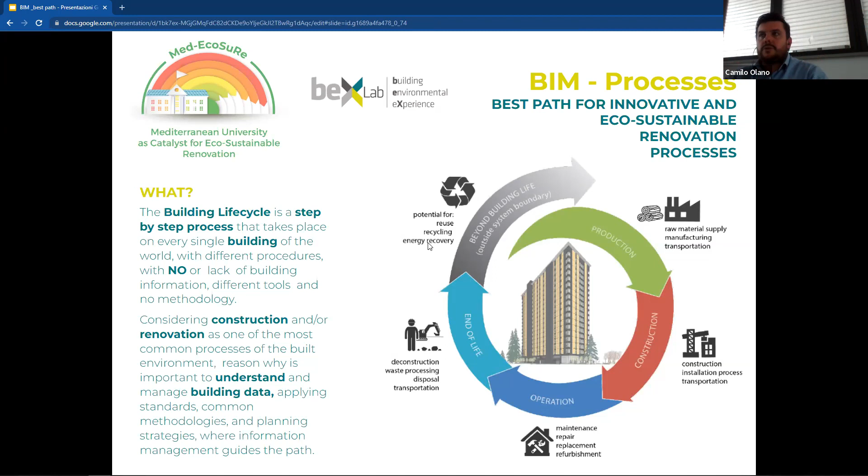So who is intended to live in this? The building life cycle process is dedicated to the building managers. Building managers means in terms of teams of people working together, reading, understanding, managing information that may come

through the life of the building and that comes from the construction process, from the planning process. So they have to mix up both informations. They've got to understand where we have the problems, where we can act in a different, specific way, or here or there, where we can just get more profit in terms of energy efficiency, or in terms of the best solution for the goods of the students or the teachers, or the specific use that we require in terms of operational matters regarding the university campus.

I'm going to be talking most of the time referring to the example of a campus, because it's what we're intended to work on through the MedGreen Forum, the Med-EcoSuRe project. Sorry, cables are crossing down.

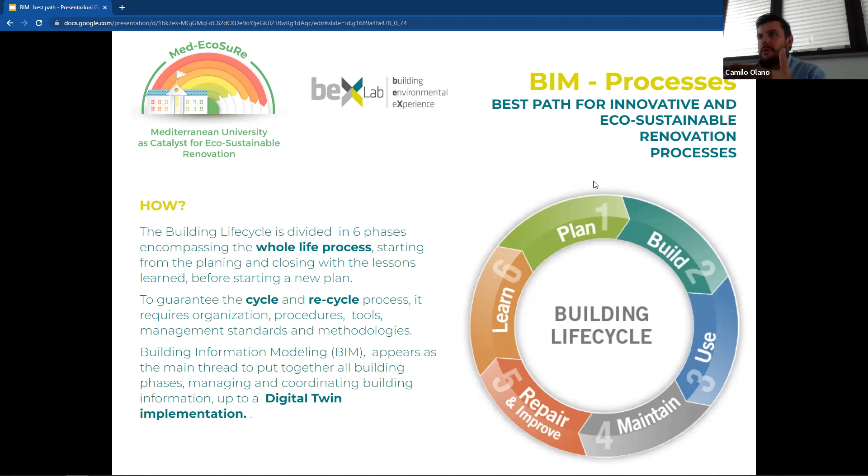We can have all this information together. We can collect information from many different parts, also during the life of the building. We collect them through the planning and construction process, but the building doesn't stop there. It's live. We can have another type of data, another type of information connected to this information that we already got, to enlarge this knowledge of our buildings. We can use it also through a digital twin implementation.

So why are we thinking of something that is, we are talking about managing information. We are talking about poor knowledge of building consumptions. We are talking about a knowledge of building components and materials, difficulties or inefficient maintenance and operations of buildings, and all the planning and renovation processes that are not cost effective.

Because if we don't have the information of all these things together, how could we plan something? How could we really target to get something and really understand what we plan is intended to do something and achieve it? And this is how the big problems we are having now, also here in the university.

We've done a survey. We tried to understand how they manage all the building assets in the university. And believe me, these four elements, these four matters that I'm showing here are the most representative of the big problems that we found here in the university through our research and trying to understand how things are.

In this survey, we enlarged it also to other entities, other universities who are managing assets, and the problems were nearly the same. So the lack of knowledge of the information, the lack of uniformity, consistency of this information is one of the most problematic matters we've got.

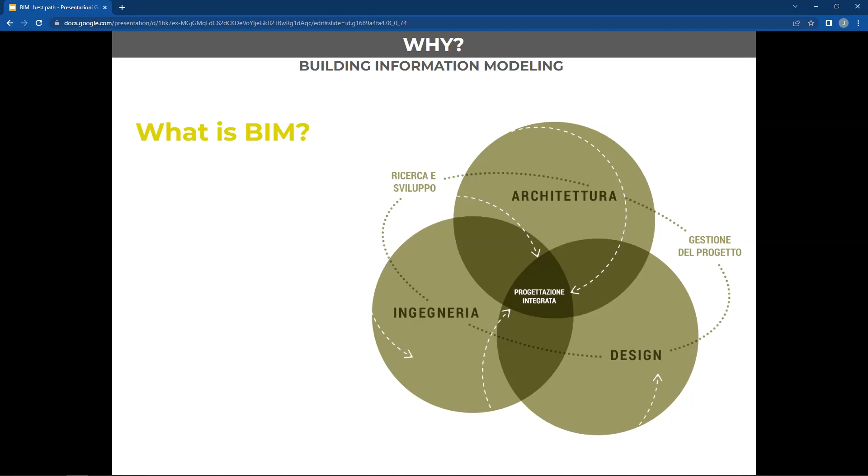I can answer that if you don't mind. Yes, please. BIM, as you said, is building information modeling, and is considered a process to create and manage information on a construction project. We can also view the project life cycle as well, and use a model to make a digital description of every aspect of a building. Is that a good answer? Yes, it is the right answer.

Because there is no right answer, there is no wrong answer. If we answer in the way you did it, because we talk about information, you talk about process, because it is what it is - it's just a process. It's not a software, it's not just a model - they are containers of information that are part of a process that goes through the planning, construction, and life of an asset. That's how it is. So the important thing is that it's an integrated project that has information from many different roles, from many different inputs that are not only the ones who are planning, but also coming from the ones who are going to operate it, coming from the ones who own the asset.

So we've got plenty of different directions from where the information comes and how we can process this information and use it through all the different phases of the building life cycle. The term BIM continues to evolve because over the years, from different points of view, according to the phase and the use of different kinds of information, the meaning of BIM has been evolving.

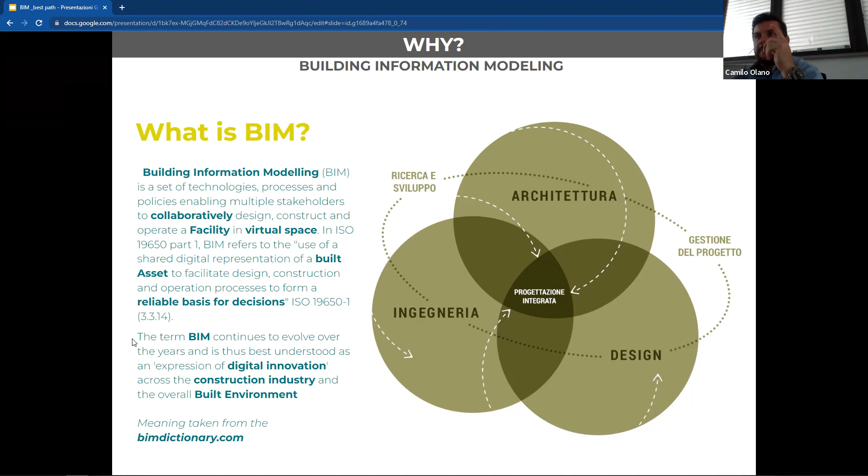But it's interesting to see that something common is coming, and to understand that it's a process. It's very nice because it's the first time that someone has answered right. So thank you.

So when we talk about building information modeling, we talk about something related only to the architecture, engineering and construction industry, as if it's a process that could only be applied to our world, not something we can apply to any other industries. They've got their own management, their own ways of managing information. We've got the BIM only for our industry, which is construction, building assets, and our built environment.

Information, as it says, is the soul of BIM. It's in the middle, it's the soul, and it's everything about the processes and the use of that information during all the different phases and the management of it.

And then the modeling - now we talk about models, we don't talk anymore about designs. But we're not talking about models or geometric models, we're talking about information models. That's something different, completely different than what we've got in mind, because a model many times is used as a 3D model, and that's just one part of the information we've got - the three-dimensional information of geometry. But we've got plenty of other matters of information that are part of our models.

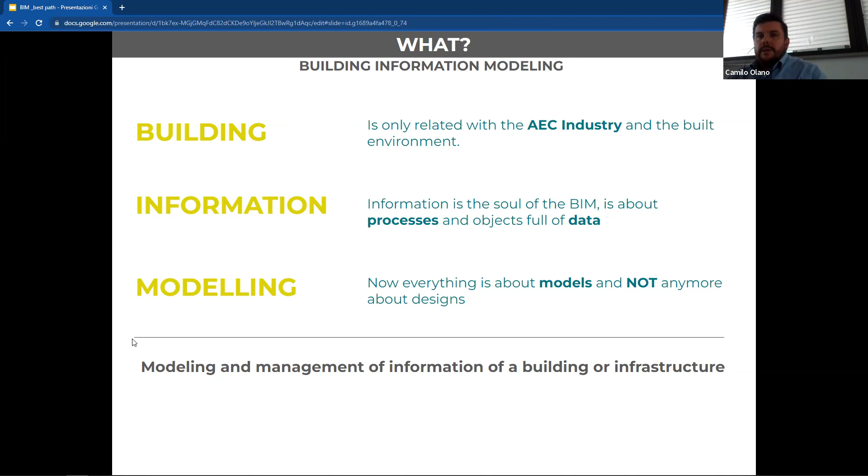The other very important thing that we've got is the collaborative process. Why? Because up to now, we have been exchanging information in a traditional way.

I need a drawing, I send a DWG. I need something else, I send you a PDF, a Word file, through emails, and now we also use Drive and folder structures that sometimes aren't even well known to everybody. We don't have control of what we share, how we name it, who I've sent the information to, or whether that's the one who was intended to receive it. There's thousands and thousands of emails and messages. Now we've also got WhatsApp messages, voice notes, photos, to exchange information.

But how can these exchanges of information be registered? How can we keep track of what really improves the process of a project?

It's difficult to see and understand. Yes, sometimes it's easiest to take a picture and send it to the builder saying, please, this has to be changed, on WhatsApp. But if he had his cell phone off, then another person arrives who never received the information - they've done things differently, and we can't say whether the information was sent by a WhatsApp message or got lost in an email that wasn't properly written. And that's how things have been done up to now, with different communications, sometimes not including the other people who were maybe interested in something we weren't thinking of.

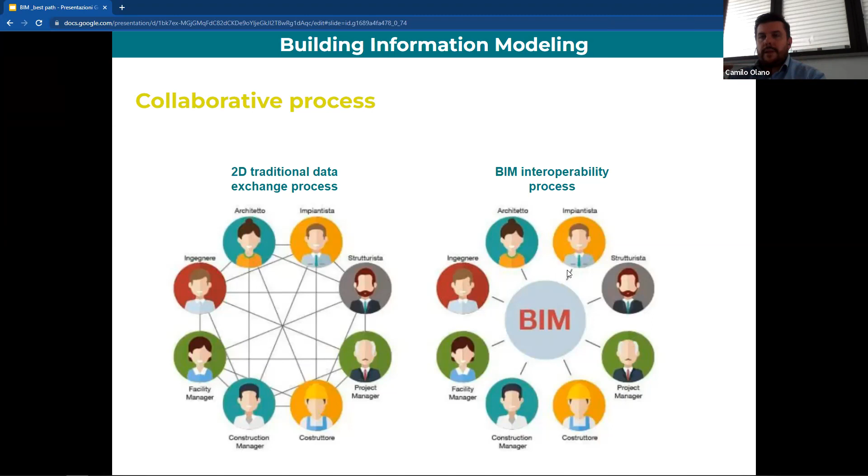That's just an example of how things should work. Of course, we don't have to wait a week to make a new issue — if something has to be changed, we can change it and communicate. Emails do still exist, and a phone call is always welcome to share, combine, or project ideas. But if we've organized everything else properly, all the other ways of communication are just intended to improve the speed of the process, so we get better results in the planning, construction, and management phases.

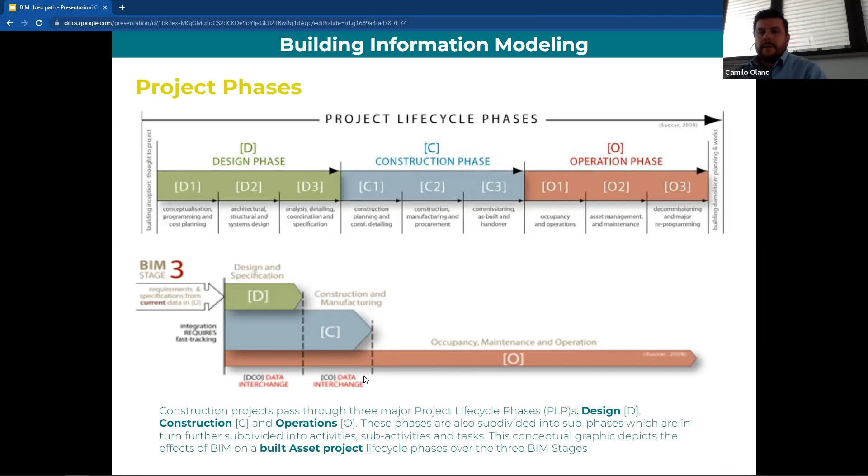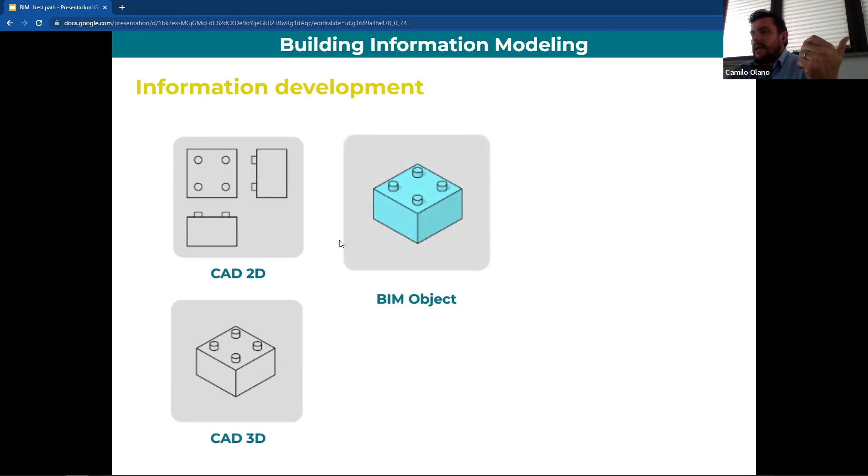But the real difference is that we've got plenty of information connected to that specific visualization — geographical and geometrical information that allows us to represent it in three dimensions. But the real value of all this is what is there that we can't see.

We've got up to 12,000 cells of information to fill per single element in a project. That's too much from my point of view, because managing 12,000 cells of information per element on a huge building carries so much information that I'm not really sure we can manage all of it.

So it's important to understand which information is really required, which information do we really need, which will be useful for the operation, for the construction, for the planning, for the future. That's the information we may require to place on a model. And according to the phase we're in, this information may get richer, may get used, and at some point it may not be useful anymore, so it can be reduced.

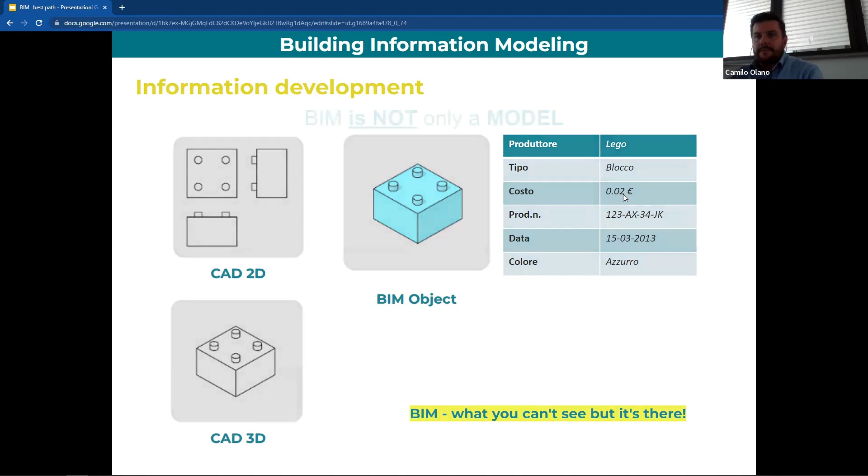What I mean is BIM is not only a model. It brought a lot of new different terms, different documentation, different specifications. And now we talk about all of this.

For example, the CDE is a common data environment. We talk about the IFC, that is the exchange file for the open BIM. We talk about LOD, that is the level of detail. We've got clash detection, the COBie. COBie is the way of exchanging information between the project model and the asset model, in terms of exchanging information from the project to the operational phases.

But that's only in the UK, which means we've got all these new terms, and all these terms have to be adopted, have to be assimilated into our life as project directors, as project planners.

And we have also the new BIM dictionary, because it brought so much, but then everything is written, and that's helpful, because we can just go there, look at it, learn from it. The first time we learn something, the second time we go there and look at it again, the third time we already know it. We already can repeat it, and then it will become part of our process.

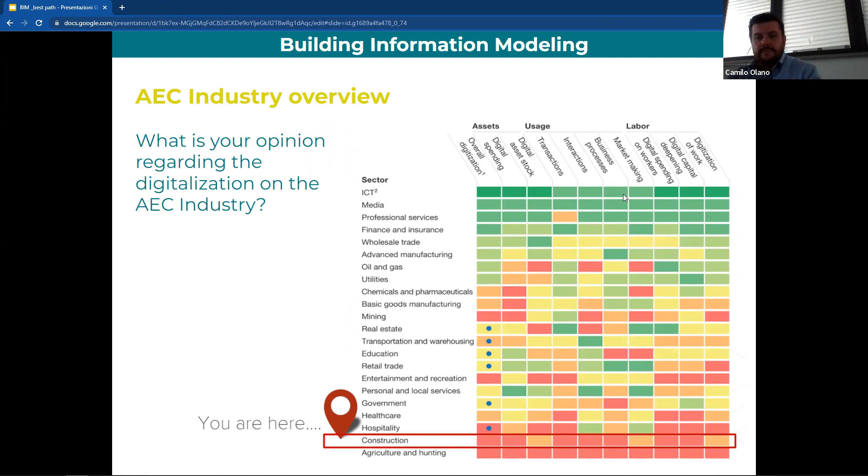So this is always something that is very nice. Who wants change? That's a real question. Who wants change? Everyone wants change. Do you want change? We all do. We all do. For my part, myself, yes, sure.

Of course we want change, but the thing is how we have to change. Yes, maybe, but then everyone wants to change—who wants to change? And then it's when everyone... no one, no one changes. Yeah, because it's easy to say we want change, we want change, but everyone else, someone else does it for us. But if we have to do something for that to come through, that's where we find ourselves in trouble.

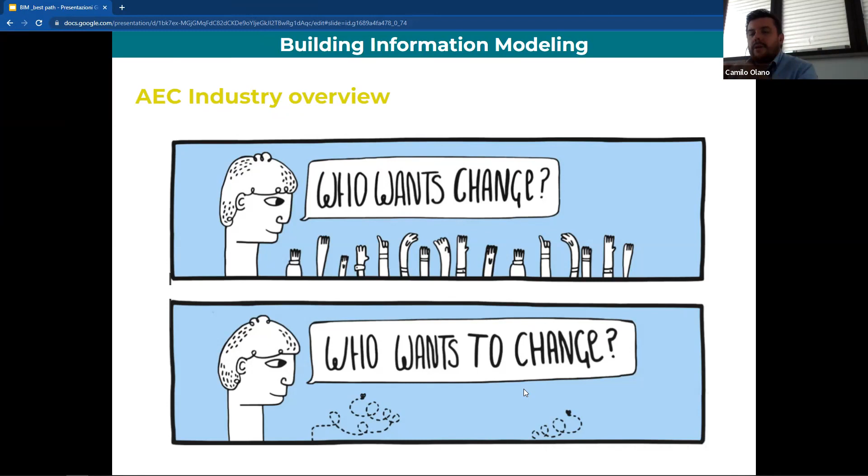How we can change this point of view from the people, how we can just get the commitment of others to make their own effort for the change to come. I think that's the most important thing we should build up, try to bring the others to our side, because I know you are keen to do it, you are trying to do the change, but we need to bring all the others together with us to make that happen.

And why the BIM? Because there are directives already done, and it's very helpful that the European community established that public bids and projects have to be developed using specific electronic tools, such as building information electronic modeling. This is absolutely good, because at least in terms of normative, in terms of regulation, someone started to think about it. The change is not determined by the goodwill of people, but by the obligation or restriction that the law has to be applied.

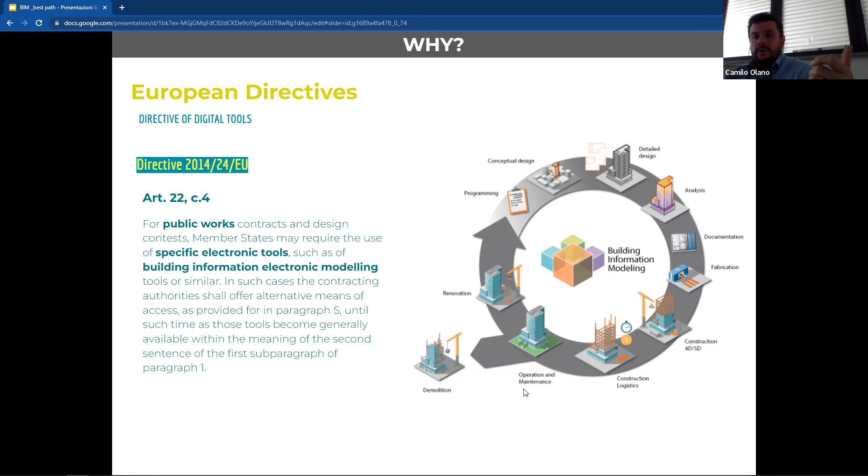It's not the way I like to do things, but somehow in some cases it helps. It helps because now these things are starting to change. A lot of work is starting to come through the people and at least starting to think about how things may change. It's scaring for many, I know, but there's something there.

There's also another important thing: there are now international standards, and national standards, that may guide us how to do it. So if we don't know how to do it, or why we are doing it, there's normative, there are guidelines, there are standards that help us go step by step, following this, following that, to explain every single step we should take to get somewhere.

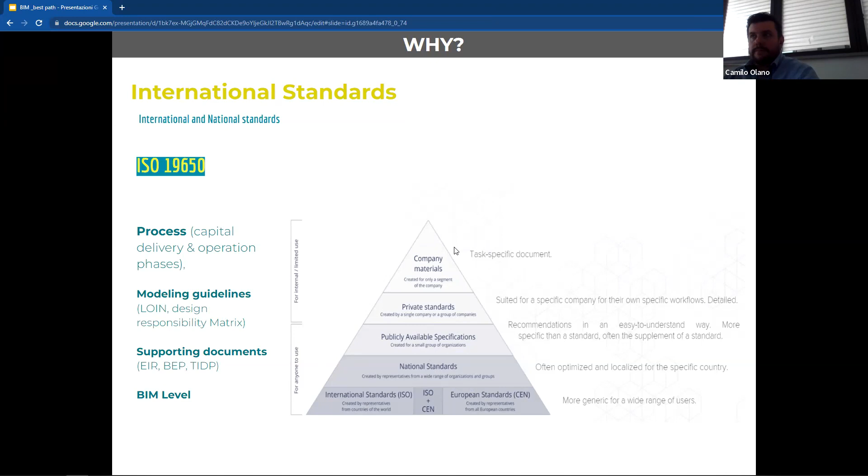There is the Building Smart entity that has been working on standardization, on terminology, on process, just to bring these things together for everyone. So there are plenty of different standards that have created all the information exchange, and there's also one huge international organization working behind it. As you can see, they've got plenty of different documents that allow us to make the process more efficient, and they're still working on improving it day by day.

We've got also the new BIM dimensions, because up to now we've talked about 2D and 3D, which are the geometrical part of it. We've got the spatial data, the specifications, the aesthetical elements, all the components, the layers of the different compounds in the entire building. We can have all the information on performance in different terms for every single package or element inside the building.

But then we can have also the planning, the schedule for all the construction process, which is something new, because we've got all the information, and if we've got a real good planner inside, it will guide us to understand all the timing. And timing in construction means costs. Good planning will help us understand for how long we will need to work on a construction process, how many people. We can plan properly - that doesn't mean we won't have problems, but if we plan it, we will have little problems that we can solve day by day.

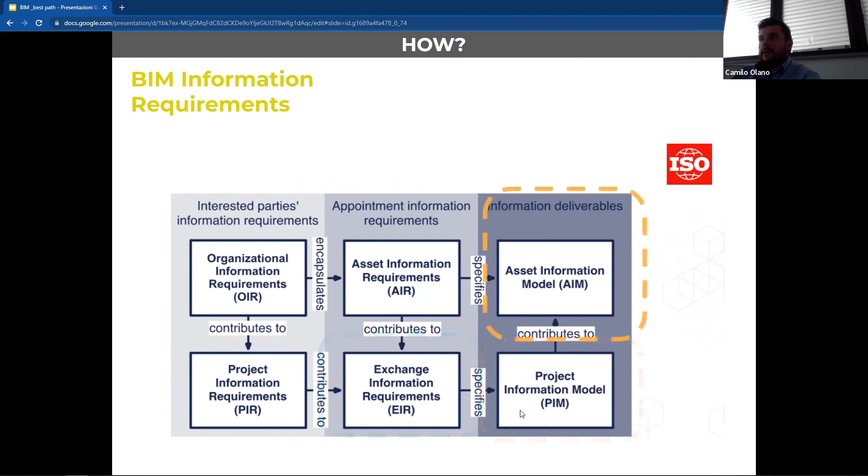Then we've got these two different levels that come from the organization: the asset requirements—how do I need the building, the project, to perform, what and how I am going to be operating, how much it costs to maintain it—and the project information requirements. This creates the exchange information requirement, which brings as a response the project information model, and then it becomes the asset information model.

What is important is to understand that we always talk about the project, but the project itself is only this little part, the delivery phase. I start here with my project, the starting point of a delivery project. We've got all the development, meaning planning and construction, and then we have the handover. Once we have the handover, we have the operational phase.

All of this is already standardized—there are books, manuals, and guidelines to follow. And you see here, the entire delivery phase is guided by the project information model, and the operational phase is guided by the asset information model.

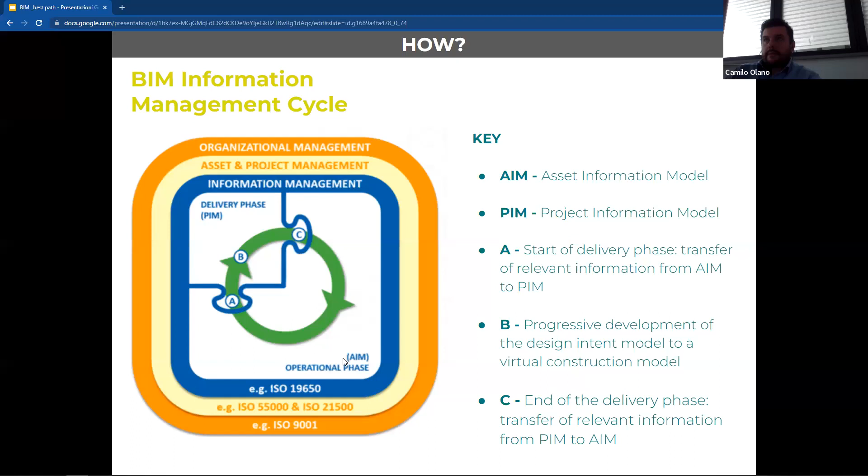Imagine all what I said up to now, which could be applied to one specific project—how complicated it will be to manage a building asset, as for example the one of the University of Florence, which is about over 300 buildings. And 20 to 25% of these buildings have cultural heritage constraints, with a lot of problems and difficulties in a UNESCO context that have to be managed.

We should somehow have its information, and we should know exactly how they are, what they are, how we can deal with it, how do they perform, if they are good or comfortable spaces for the use of a university, for a campus. Are they adequate or not? We don't know. We have plenty of it, but no information regarding it do we have.

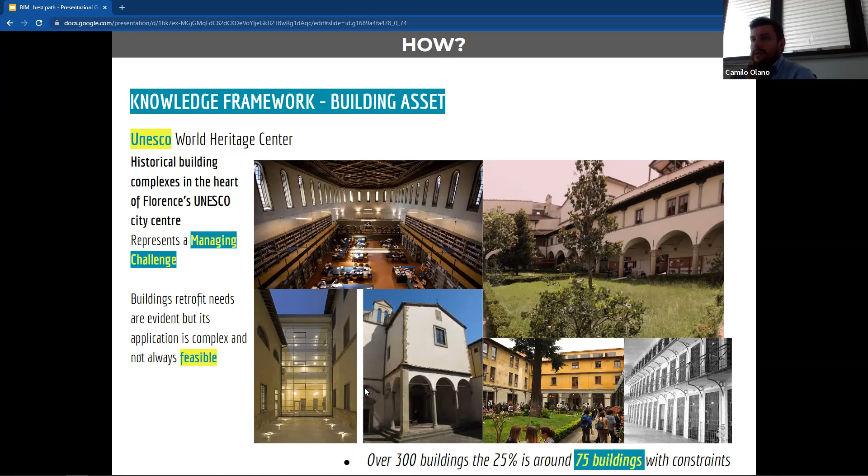But then, yes, we talk about all these documents, but we never talk about what it means in terms of specific data. So when we talk about the organization information request, we talk about interoperable data, a handbook, a BIM manual, all the analysis, all the measurements, all the performance of the building, all the intentions of planning, all the costs that the organization may have.

When we talk about the project, we talk about project coordination, risk analysis, the planning plan, project definition, BIM strategies, BIM dimensions. When we talk about BIM dimensions, we talk about 2D, 3D, 4D, 5D, 6D, 7D, which means we can talk about information regarding cost, planning, sustainability, facility management.

So if we have this in mind, we have to start organizing the information for that, but also the interoperable data that we have already organized on top. Then we've got all the asset information, which is data management, performance data, maintenance requirements, operation program. And then we've got all the documents and how the exchange of information is going to be produced—all the files, the type of file, documentation, quality assessment, quality control, milestones, decision points.

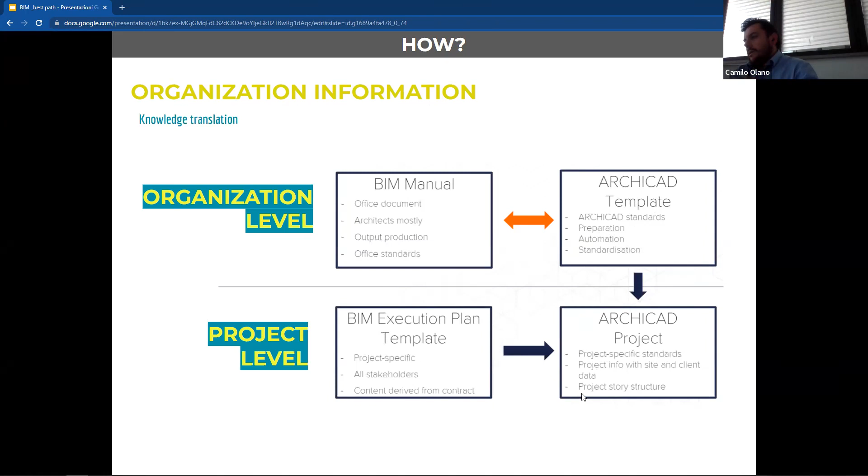So there are 2 different levels of information, 2 different ways of translating this information. There's what we've got as an organization standard, something we put here and use always this way, and then there's the way to translate the specific project into a project model.

As I said, the BIM manual is the first thing to start, because we need to understand how to operate. We need to create a common language between the ones who are going to work together. So as an organization, we need to start talking the same language.

And we started from us, then we enlarged it to the different teams that collaborate with us, but they somehow fulfill our standards, or for a specific project we can adapt some of these standards to make them equal to the standards of the other team, so that we can just work together easily. But if there are no standards, there's no way of communication, no way of exchanging information, and no way of working together. And this is how things are now.

I guess many times you have opened a DWG file with everything on layer 0, or everything with different naming that is completely incomprehensible for most of us. And how can I read a document, how can I read a drawing, or how can I edit a drawing that is completely unknown to me, if I don't really know how to deal with the information I've got in front of me? So this is important.

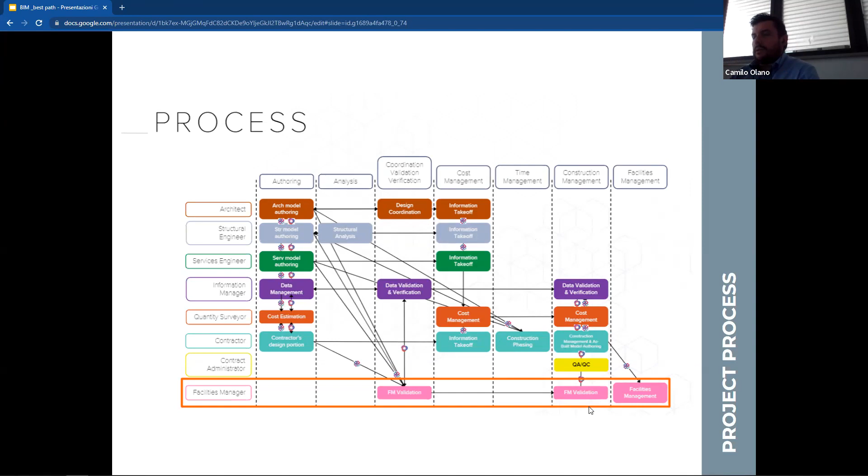We also have to define the process. Remember that this is general information, it could be this way or a different way. I'm bringing some specific roles that will be part of the project, but we can start from phase 3, phase 4, just construction, since the planning depends on how we organize, how big the project is, and how we develop the idea. So we've got the different roles and the different states of the process, and how we should interact in which specific phase, in which specific task, and who is going to contribute to that specific matter during the process. If we get this clear since the beginning, we can plan it properly. We know what information we need to provide to whom, when, how, and where. So it's good enough, the same in the different phases of the building cycle, since the planning to the operation.

So the owner is always present, the organization. The architect is the first one who starts the project, then all the engineers start, but here is very different, something we never took into consideration before: to place a facility manager at the design development phase. The facility manager usually arrives here when everything is done. So it means someone who is going to operate the building, who's going to maintain it, who's going to deal with 90% of the building life cycle, never takes part in the planning, construction, and development of the project.

Here, things change, because now he is giving his input on how the building should be managed, operated, and maintained, to the one dealing with the project. He's giving advice. So it's information that we as planners have to put in place from the beginning to understand how the building should be, how our refurbishment may take into consideration all these matters as part of the project constraints, just as fire, security, and prevention constraints. We should have all the operation constraints as well, because these are the ones that may signify important money savings, important energy savings, important operational matters that will allow the building to stay in its place, in its condition, for more time.

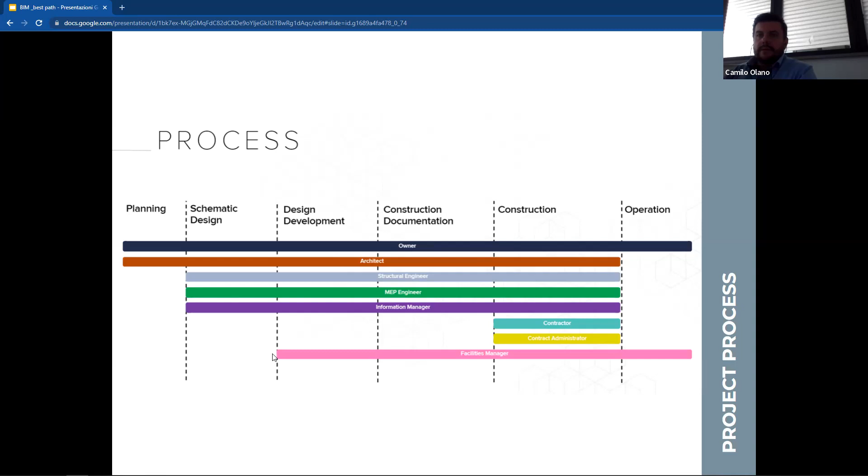Which means that we have to be proactive and not reactive. Up to now, we have been managing everything in a reactive way: it's damaged, the window is broken, just replace the window. Otherwise, we never do it like that. And the same is true in terms of software. We have to have a strategy, we have to study, we have to move forward, we have to start with smart planning, we have to get deeper, we have to introduce more information, understand which information is needed, understand how we can put that information in, and understand how we can exchange information to make it simpler for the others, to extract information from our model, to enrich our model with their own information.

And that's it, because we have to understand that a building project is not a selfish project. It's a collaborative project. And if we understand that, it means that we are not going to be against our teammates. We are going to be pushing all together toward the success of the project. We are teammates, we work together, we are together in the same boat. We are not against each other. So we don't need to pinpoint blame, we need to collaborate, we need to move forward all together.

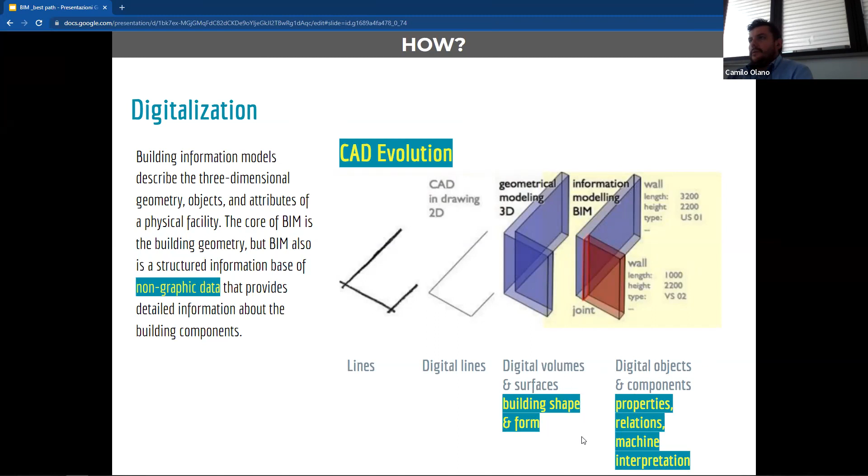The information model, as we said, has plenty of information inside it - building properties, relations, machine interpretation, everything is or could be inside it. So it's not just a normal evolution, because the evolution stops at geometry. Here we are talking not about geometry, but about information. And when we talk about information, it means we can produce the different levels we would like to.

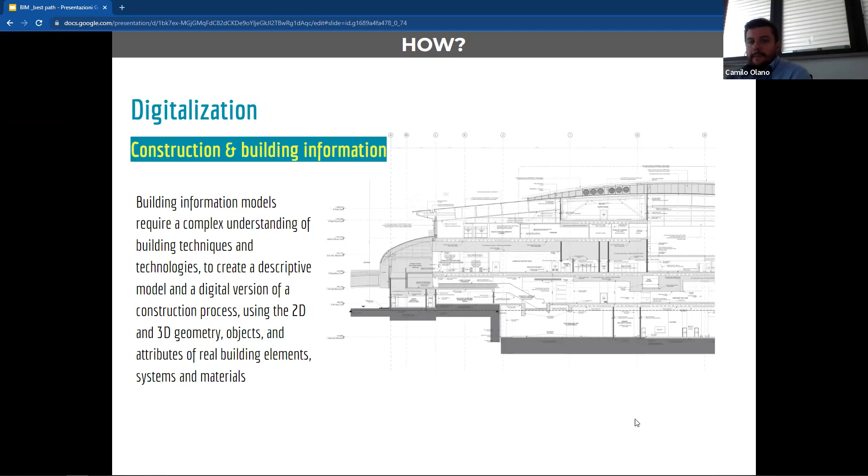And if you see here, we have a complete normal representation of a 2D drawing that's going to arrive on site. This is the kind of information we bring on site to build up a building, full of information, full of notes, full of whatever it is. But remember this is only done for the purpose of construction - the information it carries is more than what arrives there. This is an extract from an information model, for the purpose of a site.

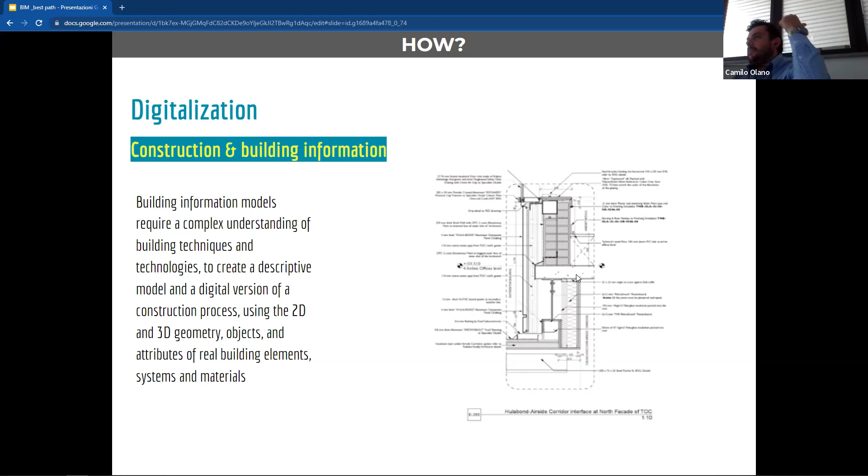We can go as deep as we want with the different types of details we want. But we are always working on a 3D model with all the information, and all this information is inside each specific material applied to the different elements in a building that will be part of the asset information model.

With the model, we can check plenty of things, and that's what I was telling you. These are the most common uses now being applied for a model, for example, the code checking and the clash detection.

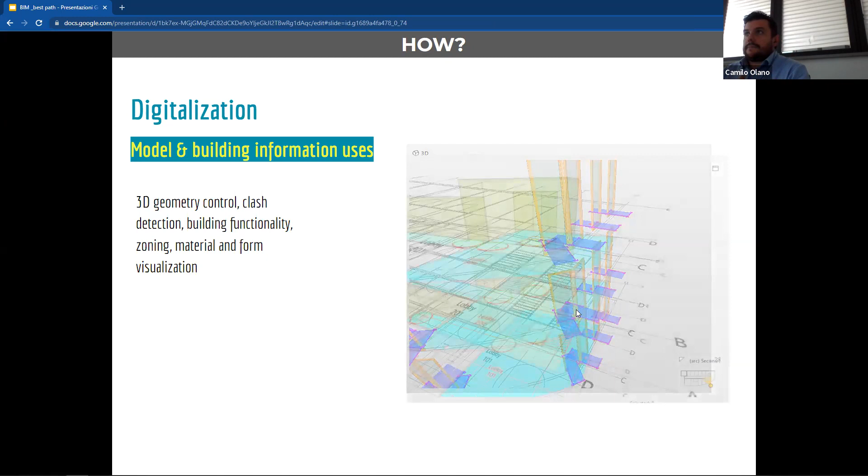We can also check the type of usage we place into a model, just to determine what are the different spaces, how we connect the different elements, and the functionality of the building itself. All these are rule sets run in the software to control and evaluate if that's the way the building should perform. We are not talking only about energy performance, we are talking about functionality, elements of operation, and authorization.

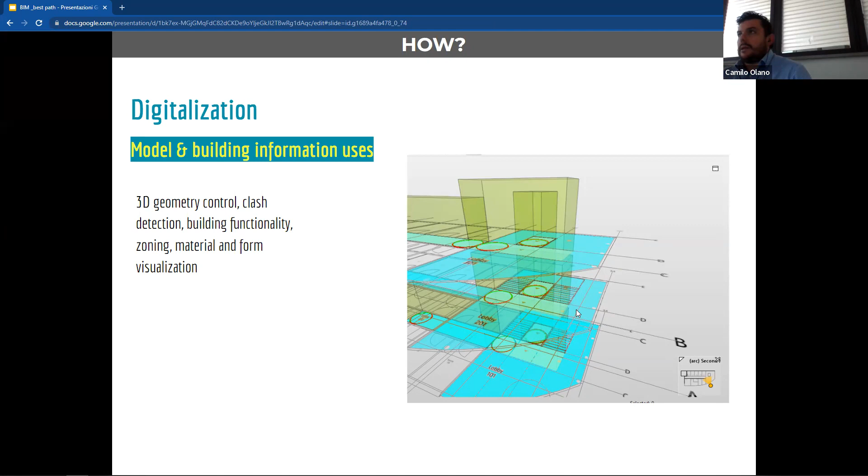And the regulations of city normative. We can also have the visualization of it. We have all the different elements that are part of the building, how we should arrive, how the services may bend to avoid clashing with the structural elements, how they develop their routes to arrive at the ceiling, how they move in the ceiling voids, where the critical elements are placed next to the man traps, so that if there is damage or something needs to be replaced or maintained, we have them closed for maintenance and replacement, instead of having, in this case, a full plasterboard ceiling.

We have all the lighting, and we placed only a few man trap holes. We organized all the machines of the lighting properly installed in a panel with the codes of each single light that might damage one day. So instead of having them all over the ceiling, we had them organized in one specific place. They open the man trap, find all of them with the code connected to the light and to the maintenance code and the facility management code that shows up the alert, so they know exactly which element they might go and replace.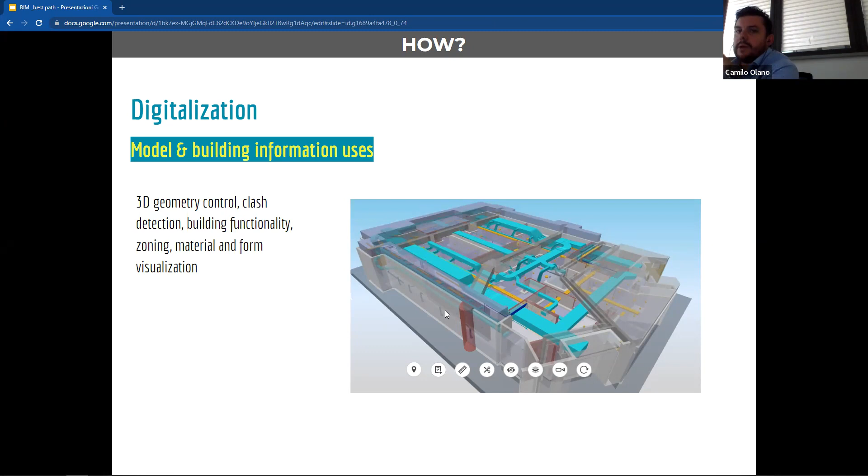So there are many uses we can take out of it. We can also have the quantities takeoff, related to financial and budget matters, because if we know the numbers, we've got the codes linked to a specific price list, and in 2 seconds we've got the variation. If we remove 3 doors, the following information takeoff will carry 3 doors less, and the price list will automatically update, removing 3 doors from the multiplication of it.

So these are the main uses of the model. But how do we create this? Because up to now, it seems easy, but it's complex. It's something we can do, but how can we achieve it? With a standard data collection.

Understanding that we have all these 12,000 cells available for us to fill up with information. But which type of information are we going to fill there? Who I am or what I am. So we need to set: you are going to be a pillar, a concrete pillar, a steel pillar, a beam, with which objects will I interact. You are going to be a structural element, a bearing element, interacting with the beams, with the foundations, which are my parents, my children, in terms of different elements that may appear.

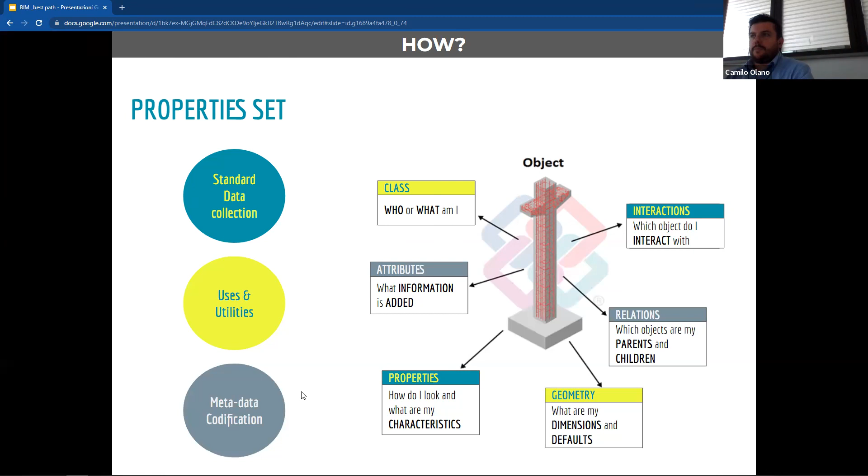And when I said that this is an information container, this is how things look like. All this, we can see it in terms of geometry, a 3D element full of different stuff that we may know or may not know what they are.

But then we've got all these elements that we are going to fill up. Those elements are bearing elements, non-bearing elements, interior elements, exterior elements, of which material, related with the floors, walls, ceilings, false ceilings, furniture, fixed furniture, sanitary furniture, part of the electric plan, part of the mechanical plan - what they are, how they work, how they interact, which are their sizes, what are their energy loads, which are their transmittance, what are the level of transparency of the glass. All this information we can add to each of these elements.

We can introduce it this way. We have all these elements and all this information. You see here is one cell with a question or with an element name, with a property attribute, and then we've got a cell to fill it up.

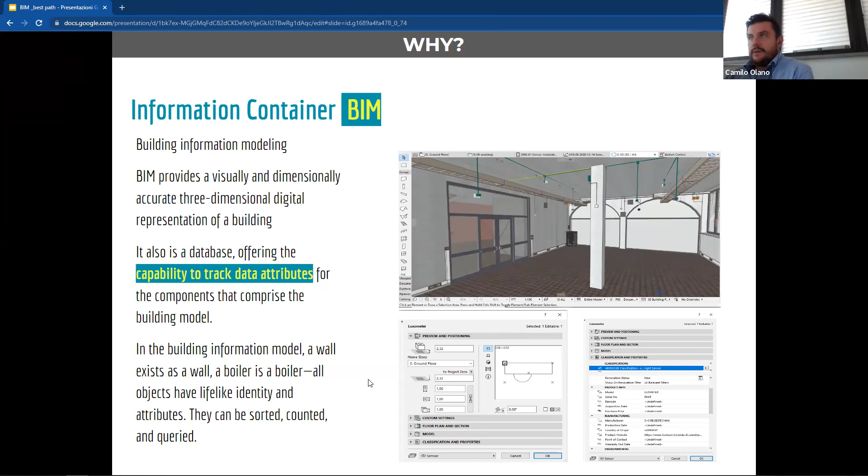Also, something very important is the way we have access to the data - all the data management. This means there is a server, it's secure, it's an FTP, a drive, whatever it is. It doesn't matter where you want to save the information, it's fine. The important thing is that it has access to everyone who should have access. Because at some levels, there is very important or private information that not everyone may have access to, so that should be restricted. But non-restricted information should be available for everyone, meaning everyone should have clear the common file naming, the common data archive, the unique folder structure. Everything should be clear for everyone.

If we use remote drives as FTPs, drives or servers, we need to be sure there is cybersecurity. Because according to the amount of data and privacy, we need to be sure that information will not fall into the wrong hands. It's simple - if we work on a small staff building in a university, the level of security is one level, but if we're working on a military university, the security should be even higher. And if we talk about a military airport, it should be the top level of security. Of course it costs, but according to the amount and quality and privacy of information, we should work on the security of it.

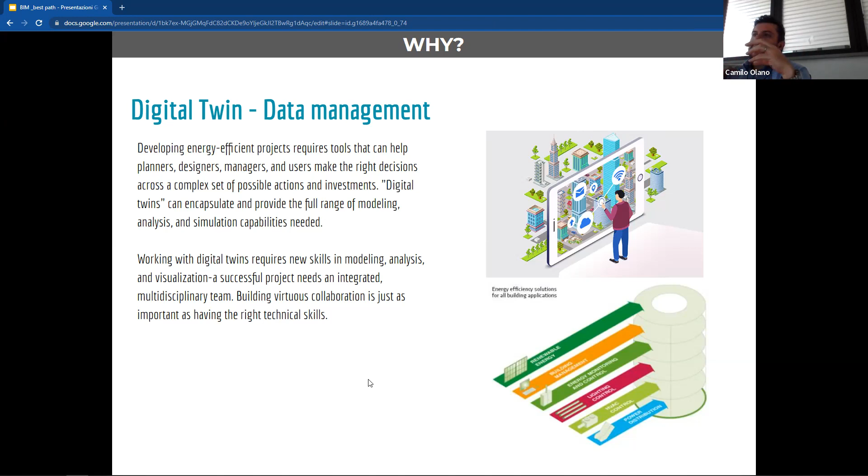Understanding the asset means we have to monitor different performance. We have a normative to be compliant with in terms of lighting, ventilation, air quality, sound insulation, to perform in many different ways in terms of comfort for a specific usage.

For sure, many times you've been in a classroom where the shape of it creates echo noise that is disturbing while trying to hear a lesson, or the lighting - some points close to the window is too much, while the other part is too dark. There's no balance throughout the entire classroom. You hear well in some positions, in others you don't hear anything. Sometimes you cannot see. Some cases we have very good classrooms where we like to have lectures, and some others where we really don't like it.

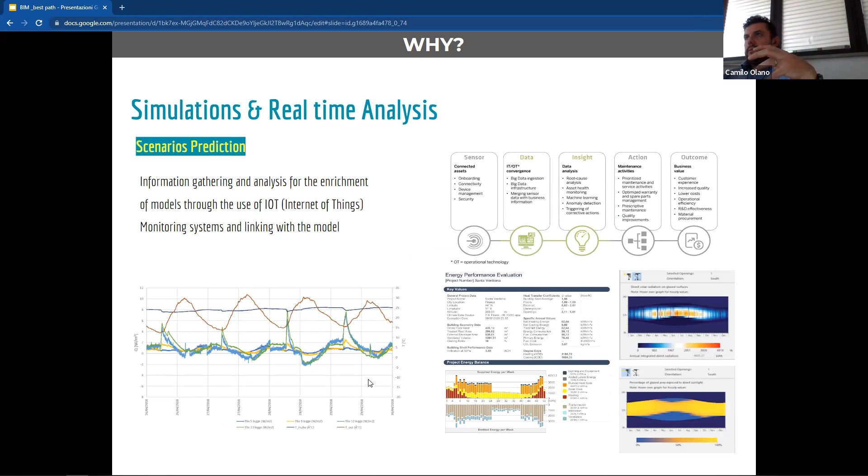This is what we have been using here - we've got this monitoring system to allow us to understand what we've got, how it performs, to make predictive scenarios for the future. All these prediction scenarios will allow us to get somewhere, to get simulation, to get cost-effective analysis, and everything we are doing and have been doing up to now.

Everything has started from an information model, and we took out all this information we converted into information available for the different processes and collaborative elements that we developed through the time.

So if you want to have another 5 minutes break... No, don't worry, we are still working and keeping track of your presentation, of course, and the information you have provided us regarding BIM and how it can be used and the legalities. I think at this time we can have a small break once again to give a breather to the participants, to gather any questions they may have, and to continue with your presentation.

As I can understand, we are going to talk about air and air quality in a building. No, it's the asset information requirements.

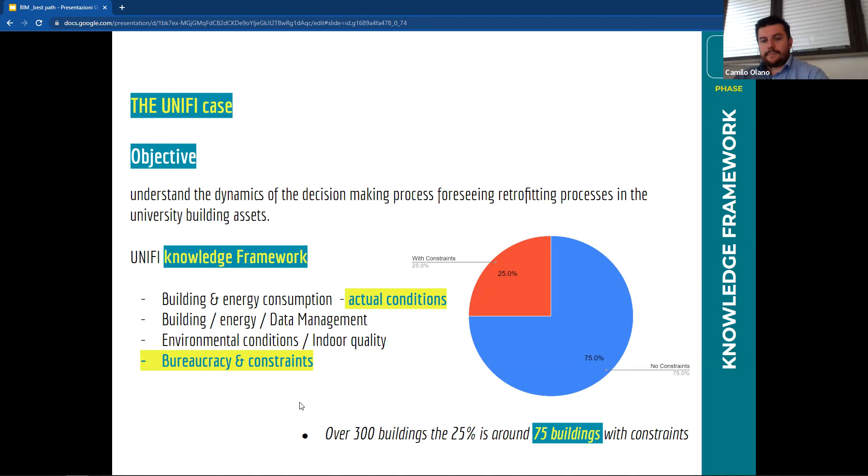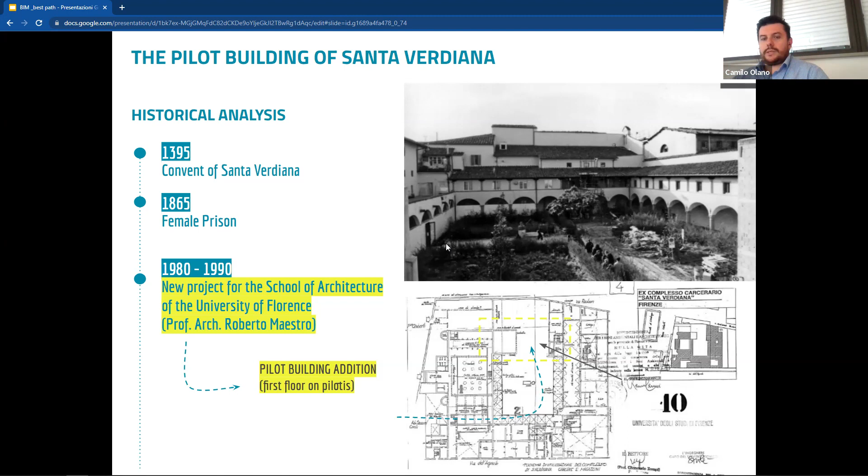Quickly, this is the complex where we are now—I am exactly here behind this window. It's a very old complex with all the periods that came through since the 1300s having changed the building, and it's protected under UNESCO heritage context, so we have plenty of constraints here.

Here in the lab, we started thinking about how we can break all those barriers: the lack of information, the building constraints, the complex bureaucracy, the high energy consumption. We started talking with everyone—the public administration, students, building managers, and colleagues who are architects, teachers, energy managers.

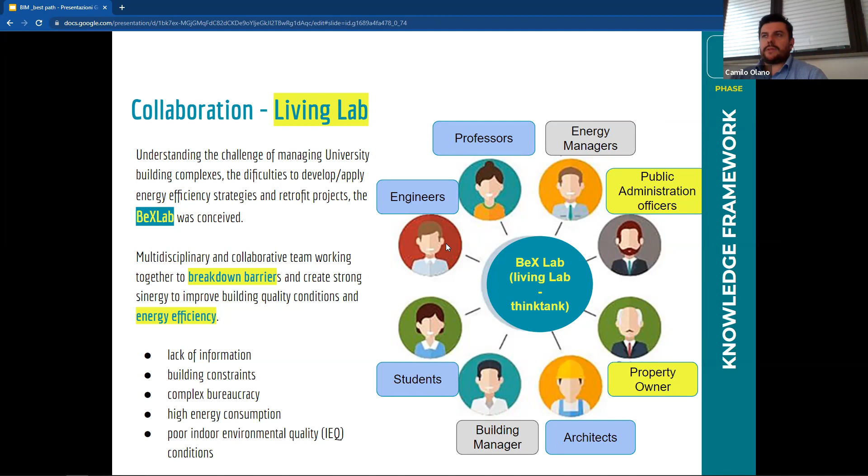We put together whatever was in our knowledge as a think tank. It doesn't matter where good ideas come from, because everyone is able to think and contribute. That's one of the most important things—being collaborative, not competitive, because we are not at war against anyone. We are just enriching ourselves with whoever wants to give us a hand to move forward. That's our main belief, and we're still working like that.

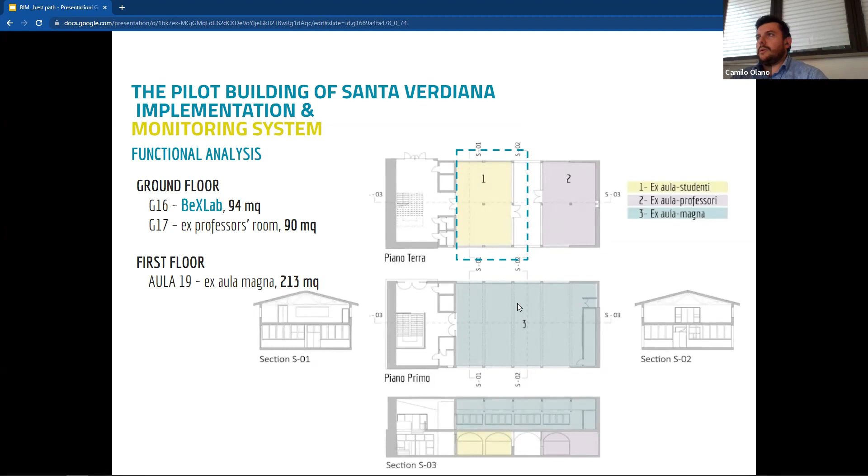To start, we began with this small room that is around 90 meters, nearly symmetrical to this one, with another big room on top of us. These are the rooms we'd like to work on at the beginning, and we are monitoring this specific one, and then we will measure the other ones too.

As I said, we plan in a very circular process, because it's not a linear process. It's something that starts and ends with the intervention, the handover, and all the post-operation process. At some point in time—I'm not saying tomorrow, but maybe in 20, 35 years, we don't know—it will start again. So at that point we will not need to start from scratch, but from what we left and from what we learned in those years.

From the model, we extracted all the 2D and 3D drawings for different purposes. Remember we've been using this information to exchange with other different software for specific matters—in these terms, we were talking about energy efficiency, so we were working on that specific matter.

Remember, something very important when developing a model is to understand the purpose while you are developing it. This means the model may contain only the information you need for that specific purpose, because you've got 12,000 cells, but you don't need to fill all of them since you won't use all of them.

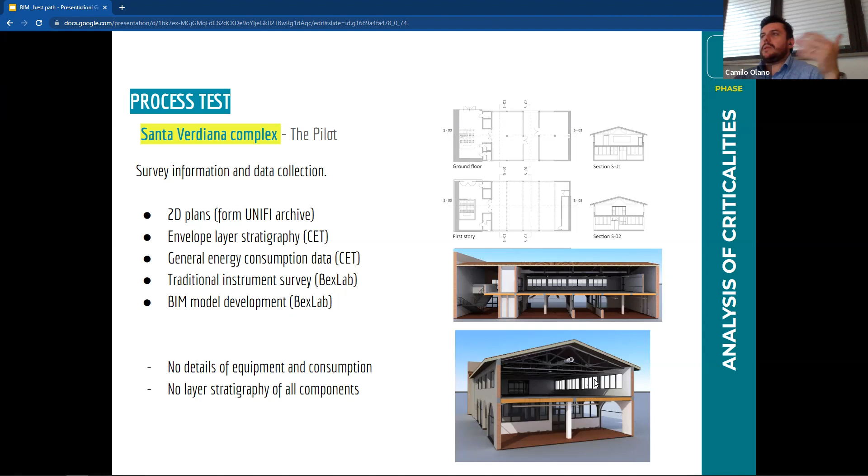We built the model with the information we required at that specific moment, and with that information we worked on calculating all the performance in terms of transmittance of the external envelope, meaning slabs, glazing, walls, and roof.

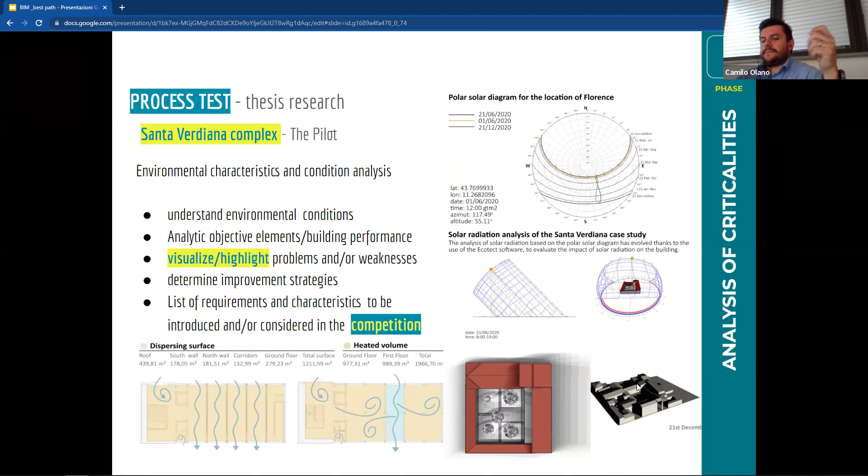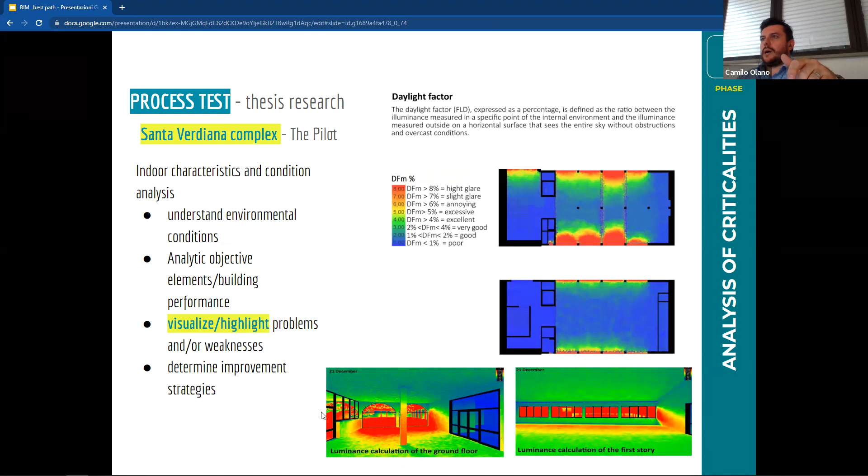We put that into different software to analyze the effect of the sun, the sound performance, and the wind effects on the building. We also analyzed in another software the daylight factor and how it affects the interior space.

We use the model also to create the monitoring system. We developed a model - this is the model, and this is how it looks like. It's quite similar, as you see, we've got all the colors and everything. It was a code we established since the beginning.

It helps make the difference between the type of wire that runs inside each pipe. Since we are not electricians, we thought of developing it just to have a visual tool to understand exactly how and what information is running inside the pipes.

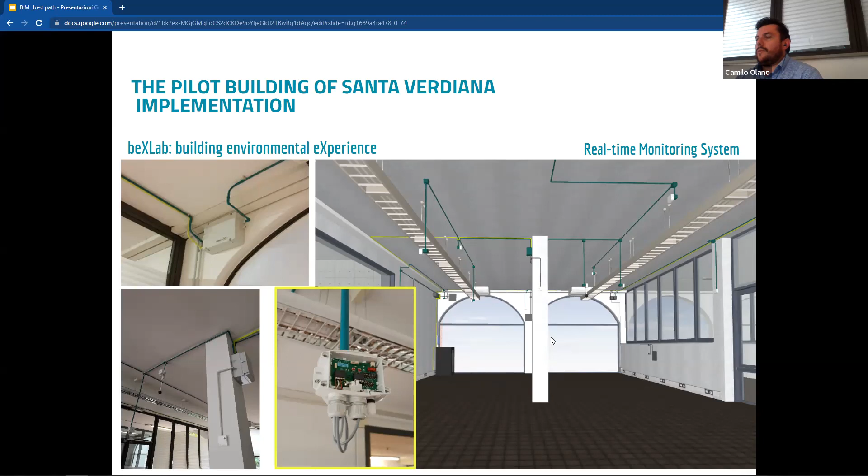We've got the yellow ones that are the power. We've got the green one that has the Modbus carrying data, and also analog data that runs inside the gray pipes. We've got all the different sensors measuring the building performance and comfort, indoor comfort quality inside this room where I am now.

To start planning, we have to understand exactly where the problems of the building were in different matters. So we analyzed it in different software. We saw what was going on in terms of illuminance and overlighting, and how it performed at different times and different hours of the year.

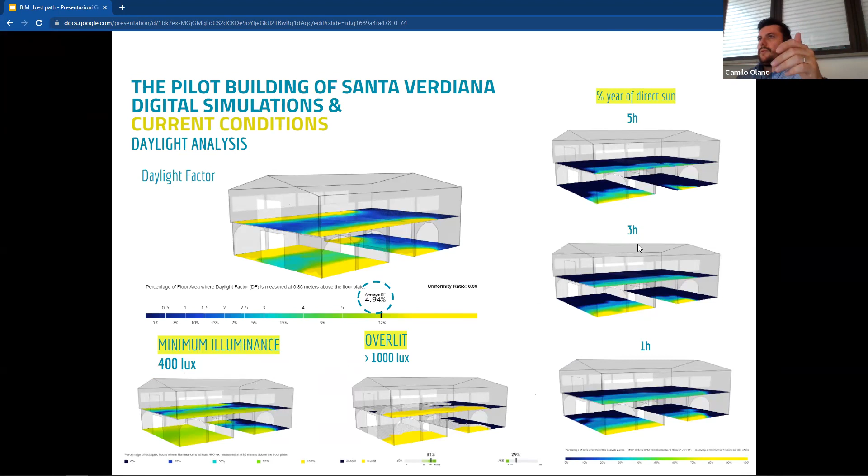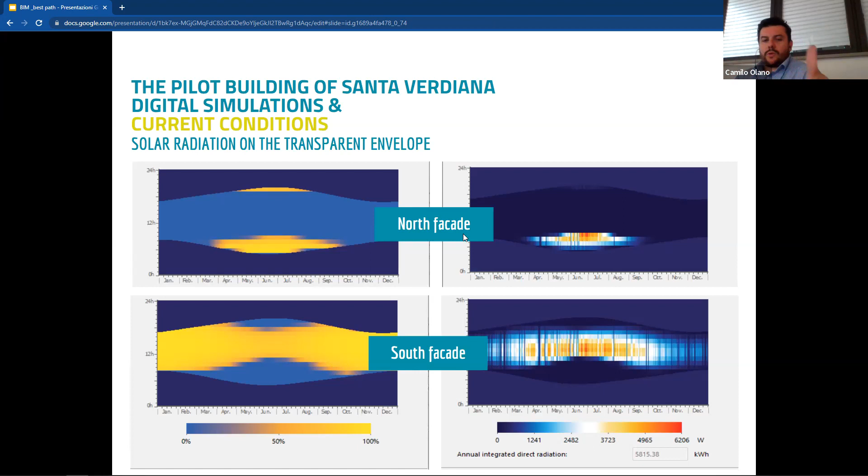We analyzed also the sun radiation going to the south facade and north facade to understand if it was correct, and how we could act regarding it. We also ran the information in virtual simulation software where we realized that the consumption was high, confirmed by the energy audit that we ran.

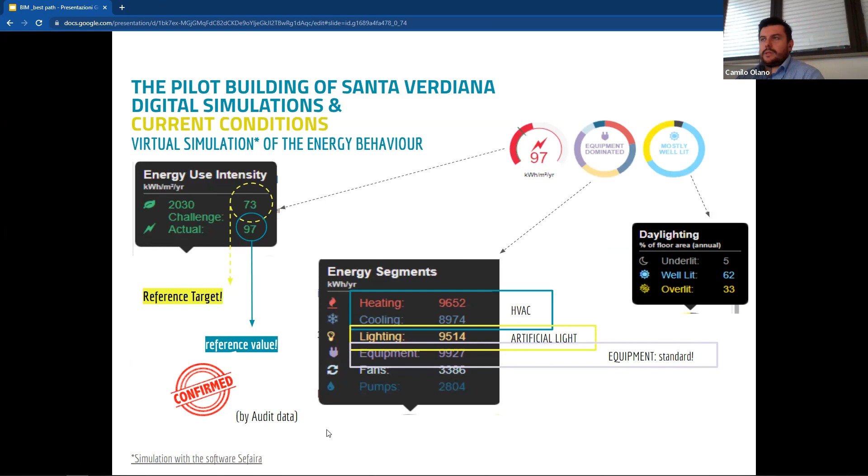Then we started thinking about what we believe are the quality indicators - what we would like to achieve in terms of energy efficiency - and we ran different simulations. When I say different, I mean plenty, because as a research team we were able to explore many of them. I'm not going to show you all of them, otherwise we'll finish maybe tomorrow, not even tomorrow, next week.

But with all of them, we ran different conditions to see how, with different approaches, we compare - for example, how it performed in the new version. So we've got the original one with a big impact from the south solar problem, and then we reduced it by covering it with different elements.

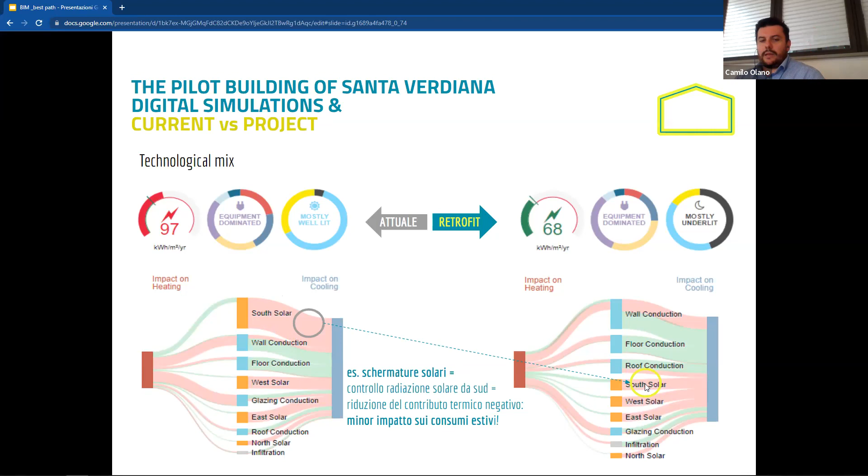By different elements, I mean a shading element going here, and we opened skylights on the roof. You can see the difference between the problem we had here with the overlit lighting near here, and now we've got more diffuse lighting across the entire floor.

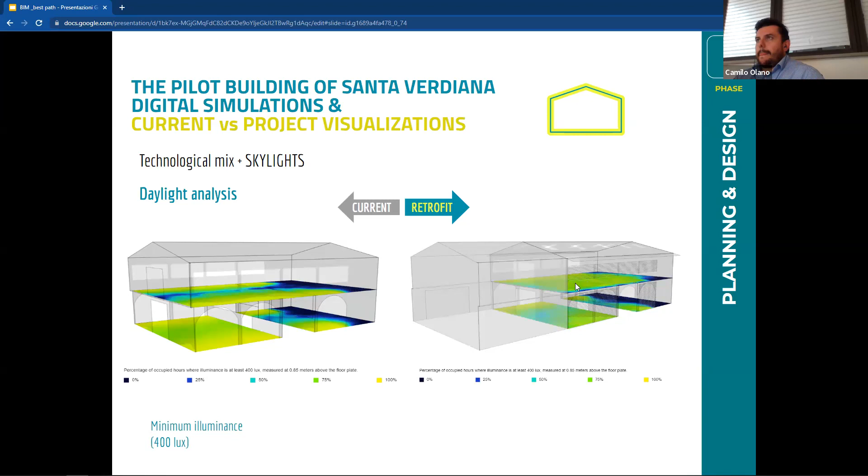Different shapes, different problems, different results. As I said before, we ran crazy testing with many different shapes and solutions, not even thinking about whether they were beautiful, just thinking about functionality and specific energy efficiency, to test the different software and the information transfer between them.

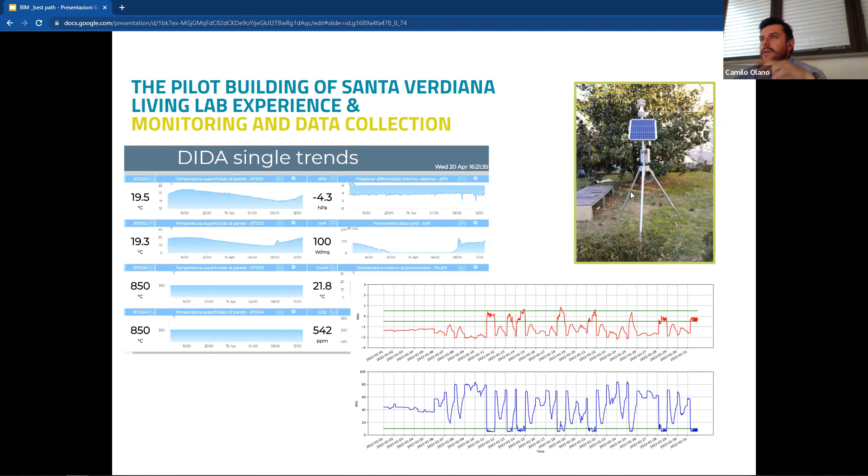We started working also on a digital twin. This is part of what we are now measuring in real time on the building. We've got also our meteo station, and now everything is connected to our model.

That's on a public side of the university, with the help of software engineers who helped us create our first version of the digital twin, which is now receiving in real time everything that's happening here and all the sensors.

We are archiving that, and we are now starting to match up all this information with the idea to create an app that can help building managers and students, or whoever lives in the building, have a building experience and understand what's going on, because we need to inform everyone what's happening. It's not something where the information just sits there for us alone.

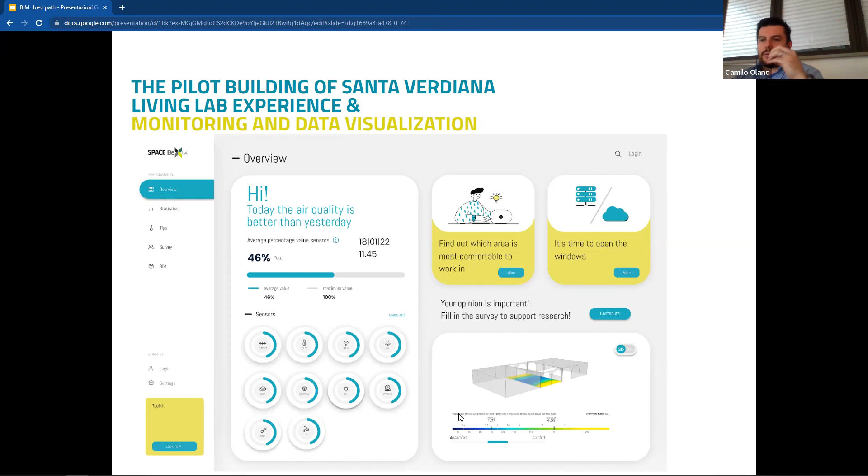A little bit for everyone, because we need to teach the students as well that every time they open a door or a window, something changes in a good way or in a bad way in terms of energy performance. Everything we do has an implication.

So we are also doing a survey, collecting both objective and subjective information, to understand how the perception of the person compares against the real data measured by the sensors. Because one thing is what the sensor measures, 23 degrees. But 23 degrees, what does it mean? People at that time could be feeling cold, feeling hot, hungry, sweating. We wanted to understand exactly how the performance of the building affects or is felt by the people inside the room.

This is the pilot project. Now we've got the first authorizations to go through, and this is what we are going to build and install in the following months. This is exactly how it was.

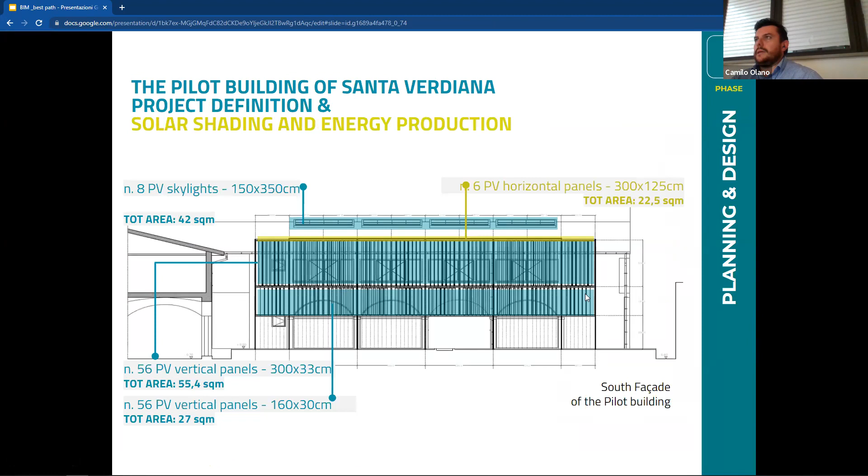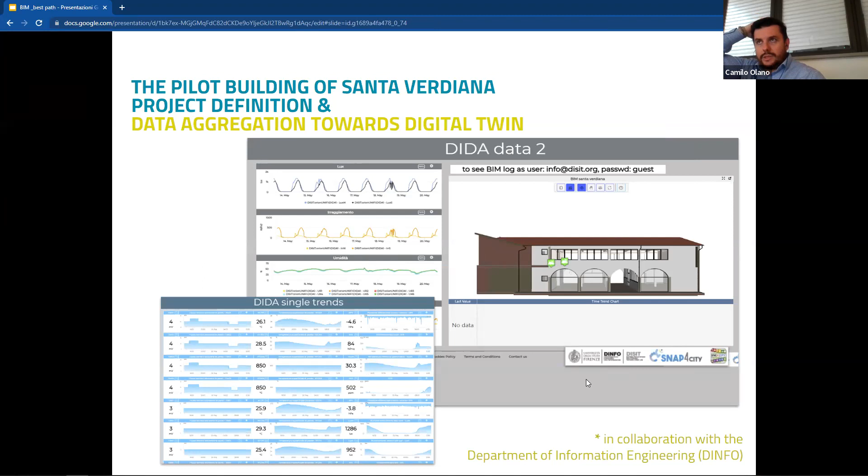And this is the first digital twin that you'll find online with all the data I showed you before. This is DINFO, the Department of Information Engineering, that helped us develop all this.

And this is already online there. Excuse me, sorry, can I ask a question? You mentioned this is available online—is it open? Can we download the model and the data you have used, or not? You can see the data there. You cannot download it. Hold on a second.

Yeah, okay, because I want to show you. This was a link—if I go here, you can see my open screen, the link. Okay, now I open the link, and you can see the building with the data. You can see it there, and you can see all the sensors in here.

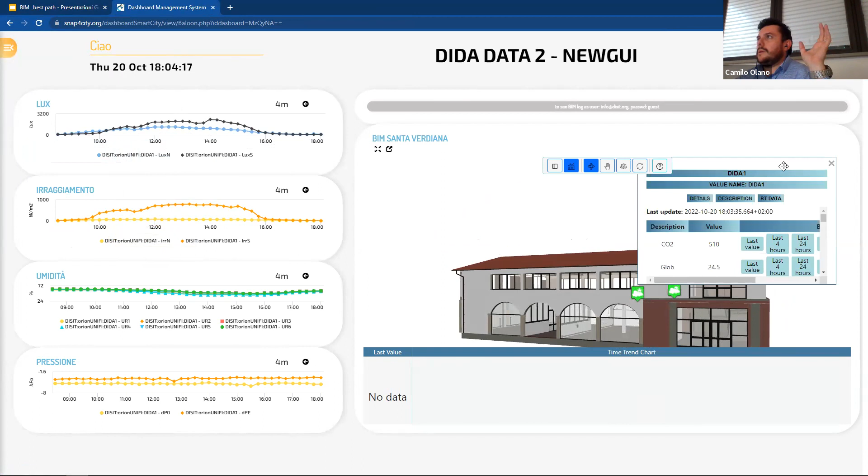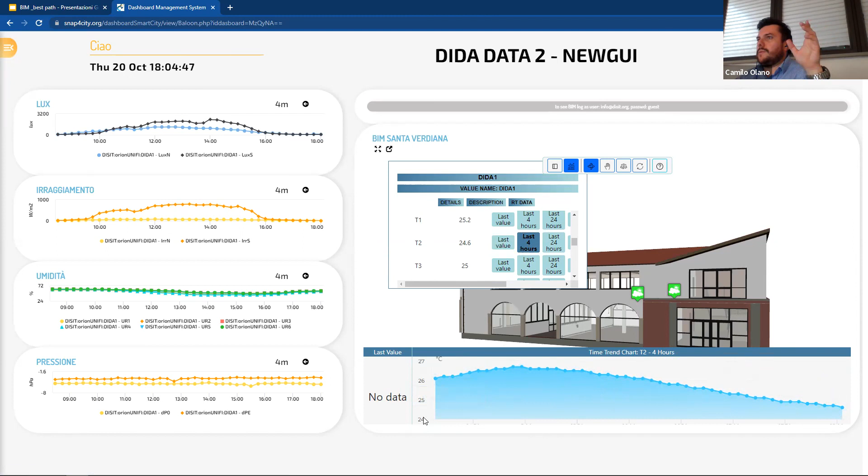You can see exactly all the sensors that we've got inside, and you can see what you want. This is the last 4 hours of this specific sensor. But then you can see, for example, the temperature, how it runs—now it's getting colder. This is the last 4 hours of measurement from this sensor.

So this is really interesting because we can have the real-time data. Thank you. So that's the first approach that we have developed. We are getting there—we are going to mature it, because of course we started from nothing. This is the stage where we are now.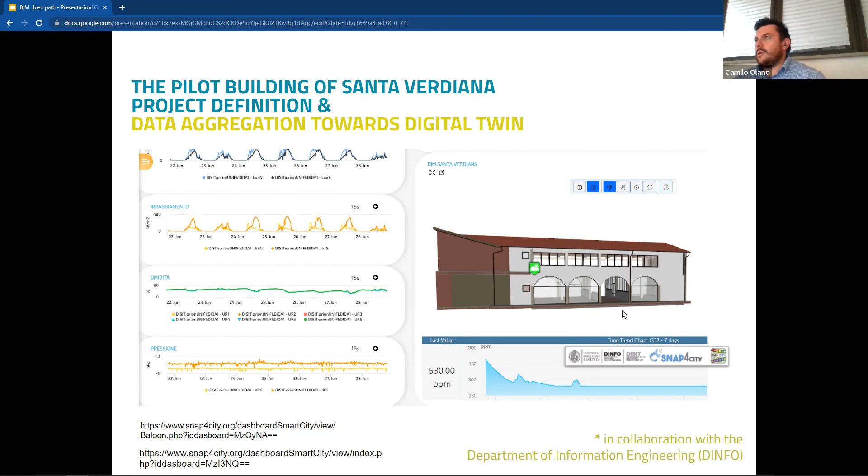Further on, Giacomo will explain in even more detail the scientific part behind it, because it's more complex than it seems. If you want, I can show you a quick sample of another version of how BIM was used in a specific project, or if you want, we can stop here now. No, let's have another example—I think it will be interesting to see the differences. A different case, a different building?

Okay, let me run through this quickly. This was St. Pancras station in London, where they wanted to install information totems. So they started planning everything—okay, what should we do, they started thinking it through. It's not something complex, it's something very simple: the installation of these elements in the station to guide the people using the station.

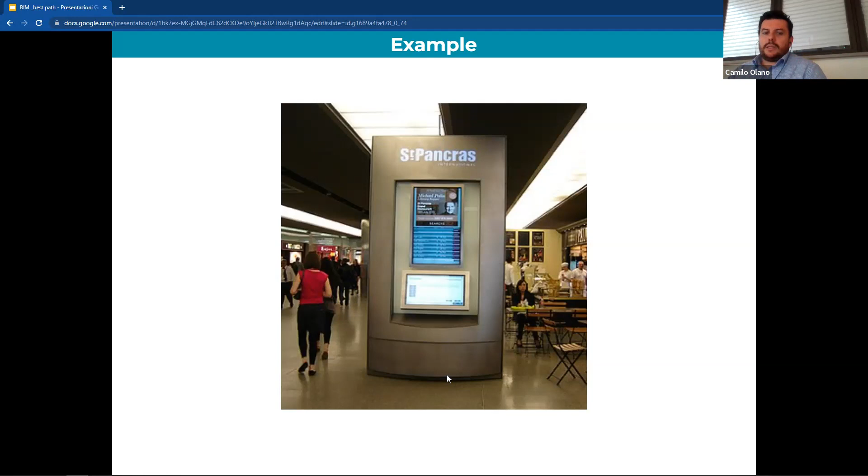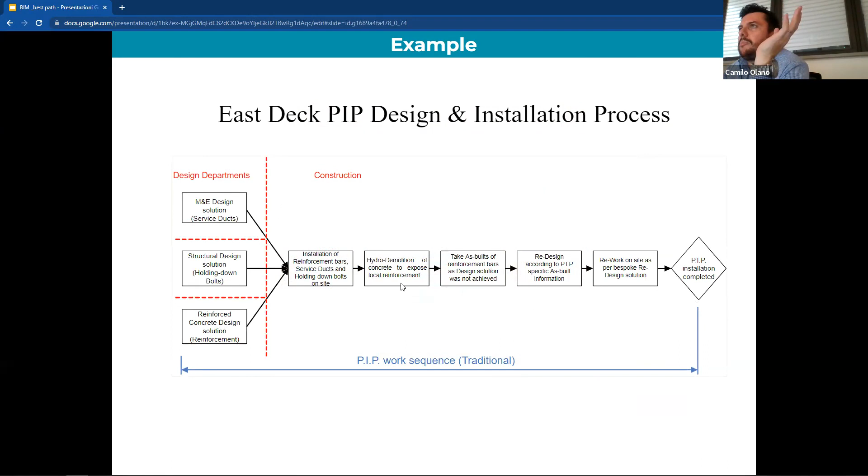It was very simple. There were 8 elements on one side of the station and 8 on the other side. So they started the project, and everything was sequential, completely linear—the traditional way. There was no problem, everything was planned. Okay, they started with the project, and that's what they did.

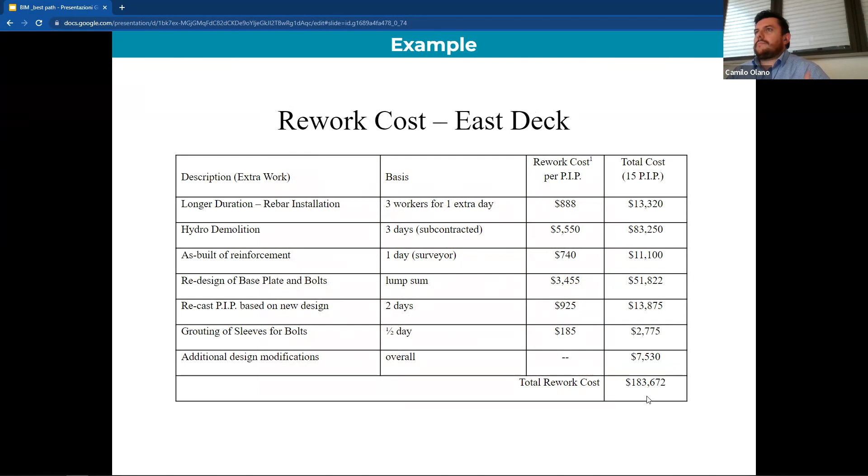It was chaotic. They started making holes where they couldn't—they drilled into structural elements. Then the elements weren't connecting properly with the cabling that was supposed to arrive. They had a lot of problems, a lot of delays, and the rework cost a lot. They had a lot of extra work, nearly 180,000 of extra costs.

So then they decided something was wrong. Someone proposed using a BIM model instead, where all information is shared, so nothing overlaps, and they could find the best solution—where to drill, where to route the systems, how to connect them. It seemed it was supposed to be more expensive, but they were keen to try because they had already spent so much. They were promised it would be better. They were very doubtful at the beginning, to be honest, but they were keen to pay for the extra cost of the design at that moment.

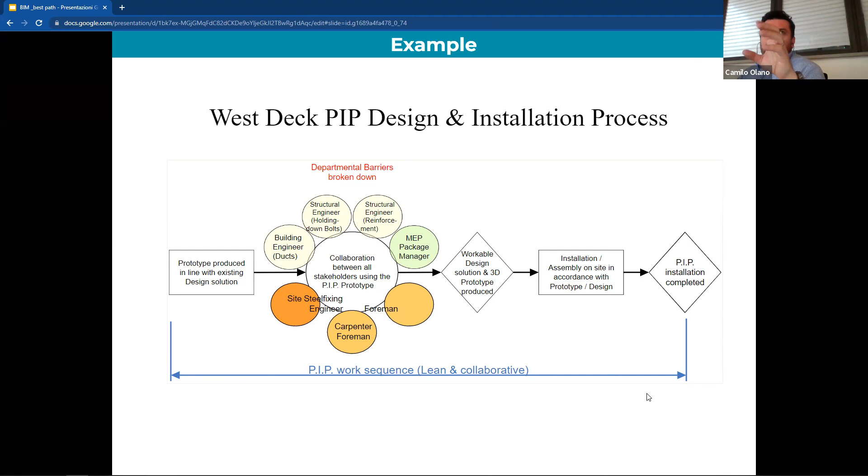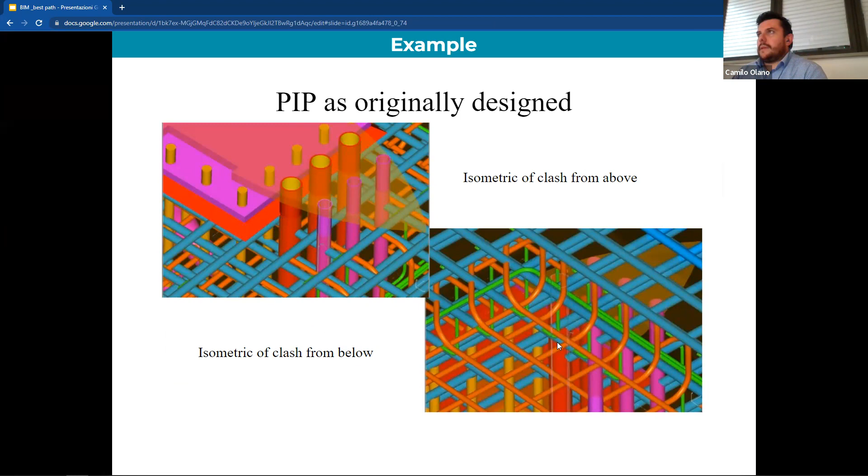Then this is what it comes. Then the clash problem was detected on the virtual element. Then it was replaced, it was modified, because everything was there on 3D.

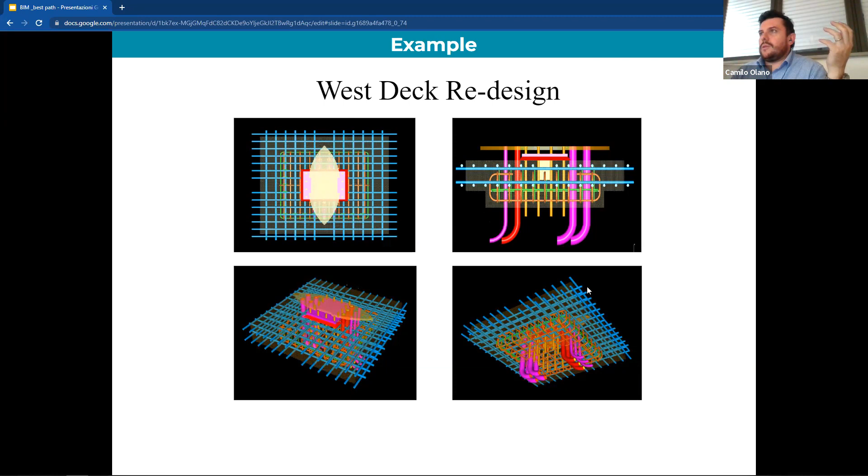So you see the BIM model, the information model, was not of the entire station, was of that specific section of the elements to introduce the totem. So we need to understand exactly what's the information we need to produce, to be sure that we are not going to overload information with something completely useless. So if you see, the information of the model was very little.

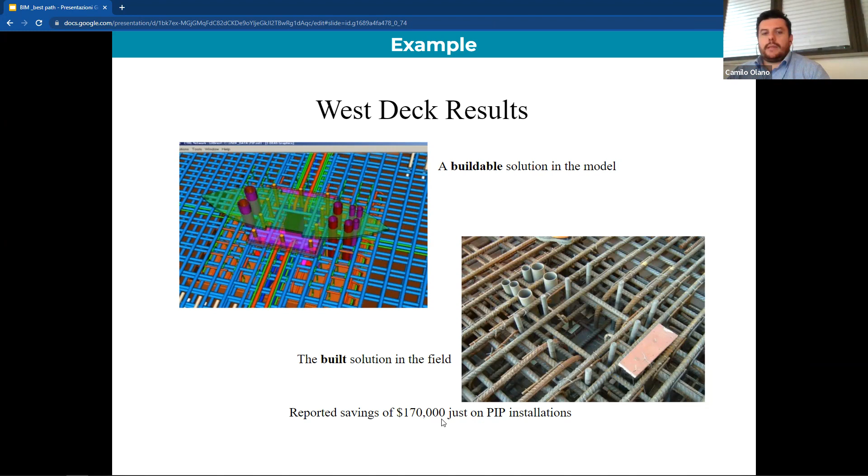...represented a lot of savings at the end, because it was done properly, it was shared, it was a very collaborative first approach from all the different teammates. And then it's how it was. The savings were there, and somehow they re-enter on what they were supposed to spend at the end of the day. So a buildable design means cost savings, because if we invest more in the planning, in the project, in the collaborative process, sharing information all together as a team, where the costs are important, that are on the side during construction and during operations, they will represent savings. Savings of money, savings of energy, savings, and they will be also sustainable.

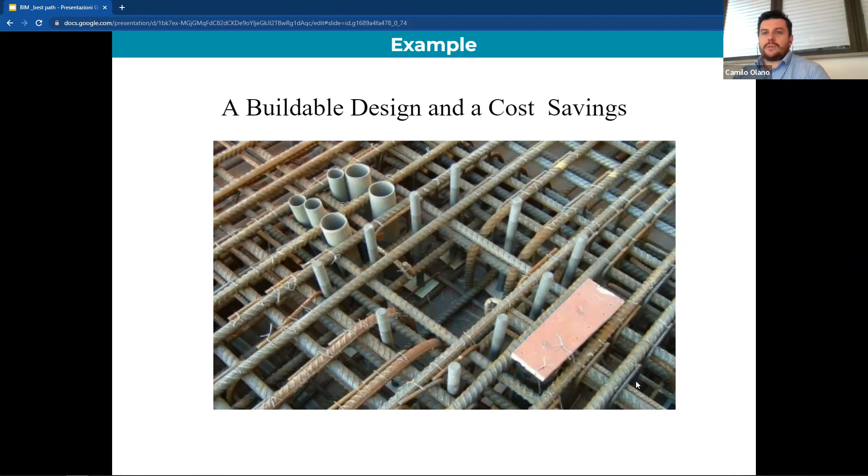And then can I ask something about this example? Sorry. You mentioned that you didn't use BIM for the whole building, but the specific location of where they were going to be implemented, correct? Yes. Yes, but how did you select the diameter, as you can say, of the location? Like you chose the dimensions of a specific location, but how did you know that it could be implemented to a slightly bigger location? Okay, you have knowledge of what you are going to install, because the totem has its dimension.

Yes, it has its own installation plates. So it was 1 meter by 1 meter. Let's make an example of it. So I will not make the model 1 meter by 1 meter. I will make it maybe 2 meters by 2 meters or 3 meters by 3 meters. It means it's going to be bigger than the area I will cover, but it will not be big enough to make me a problem, and it will be big enough to allow me to see the problems a bit more than the only specific element that I will go through.

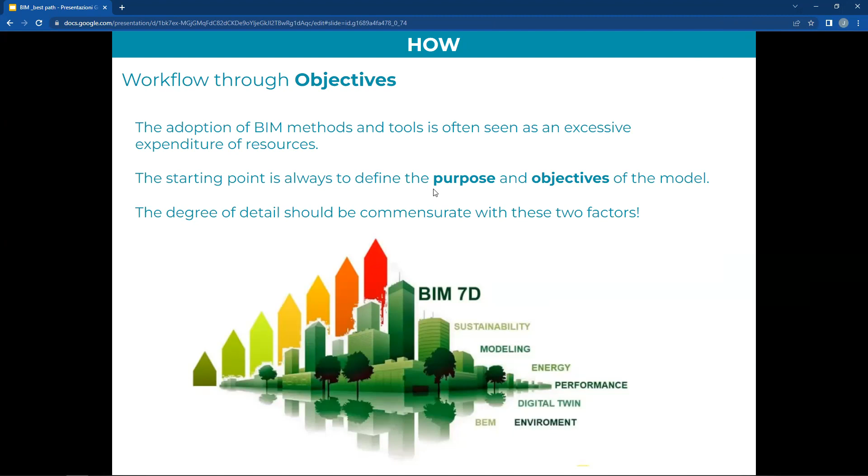Exactly. That's why I brought that sample, because it's very useful. I still carry it because it allows everyone to understand that it's not only for building skyscrapers. You can use it for very small things too, but that can really represent savings in terms of time and costs.

There's no big BIM or little BIM. There is just the way you apply it to a specific project, to a specific matter, to a specific purpose. And if the organization has clarity on how things should be, everything will flow easily.

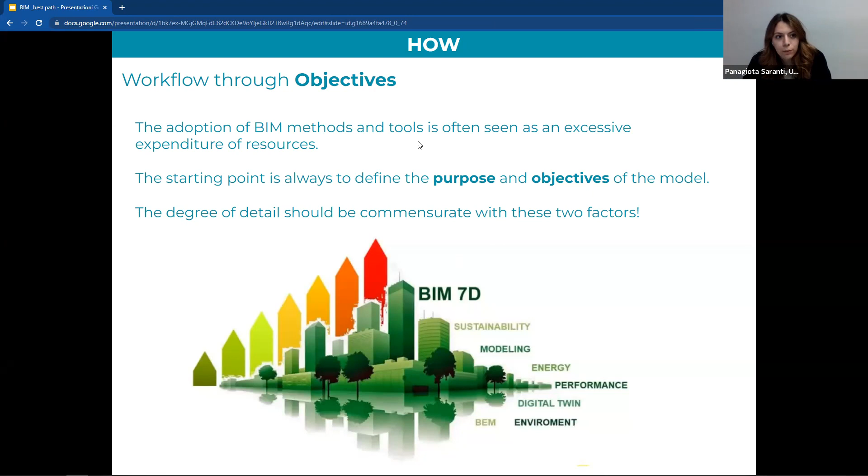Okay, thank you. Okay, so I think I'm done now. I don't want to annoy you anymore. It's okay. So it was a really fruitful presentation, and I think, at least for my side, the second example really showcased what you mentioned earlier, that we have to understand how BIM works, that it's not only for skyscrapers. That will stay with me, how it is used and how it can be used. So at this time, if there's no other question, I don't know if anyone else wants to add something. There's still some people with us, so this is good.